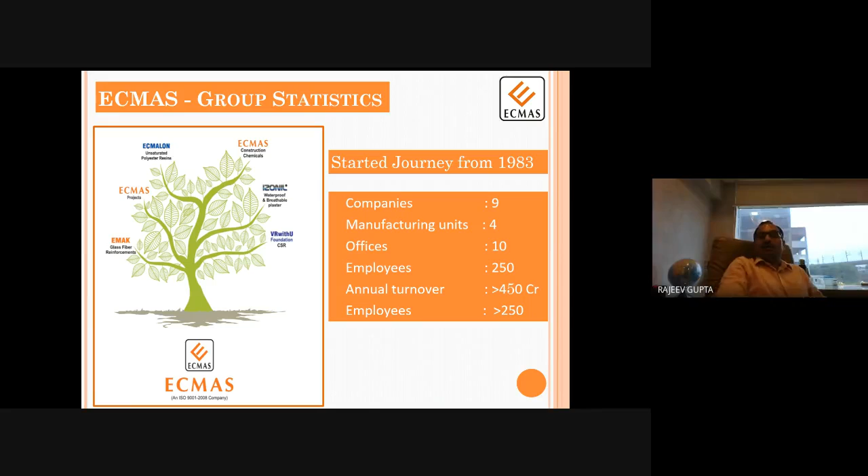Under ECMAS, we have 4 or 5 different companies, which includes ECMAS resins, under which we manufacture polyester resins, which are used primarily into manufacturing of FRP, fiber reinforced polymers. And we are a leading player, and definitely we are the largest one in South India for resins.

Our another line of business is ECMAS Construction Chemicals. Under this, we manufacture different kind of chemical solutions for construction industry. And we have more than 4 joint ventures with various European and American companies to introduce various unique and very innovative solutions to Indian market.

We also have a presence in real estate business through ECMAS projects, which construct some small format real estate projects, mainly in Hyderabad. We also have a company which deals into software, especially in healthcare softwares, and that is a company which is registered in USA, California. And we have a foundation which supports the education of poor children through We Are With You Foundation.

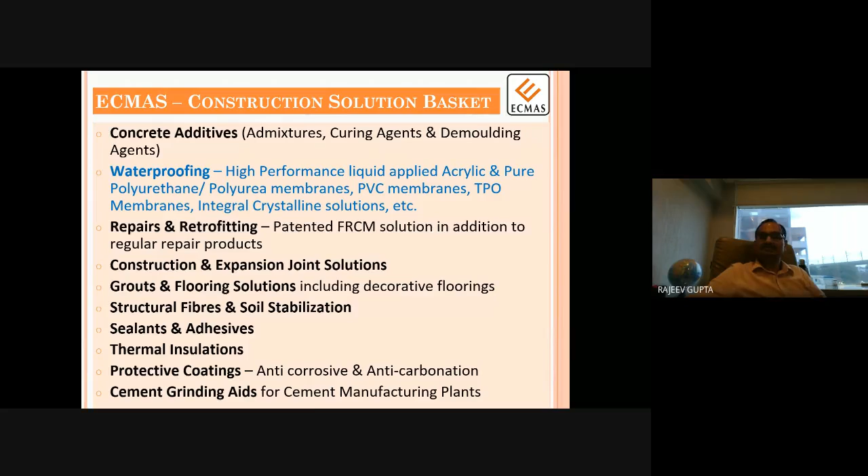Now I'm coming to our today's topic, that is basically energy efficiency and thermal comfort and recent developments in this field. So it's a very interesting subject, very relevant topic.

Nowadays, all of us as an engineer, consultant, architect or developer, we are very much concerned about conservation of environment. There is a lot of discussion, lot of concern about growing population. We all see rapid urbanization, rapid industrialization. There is an excellent growth of building infrastructure. There is a growing demand for energy. Along with this, we also see the effects of global warming, urban heat islands. So these are the effects and impacts of recent development.

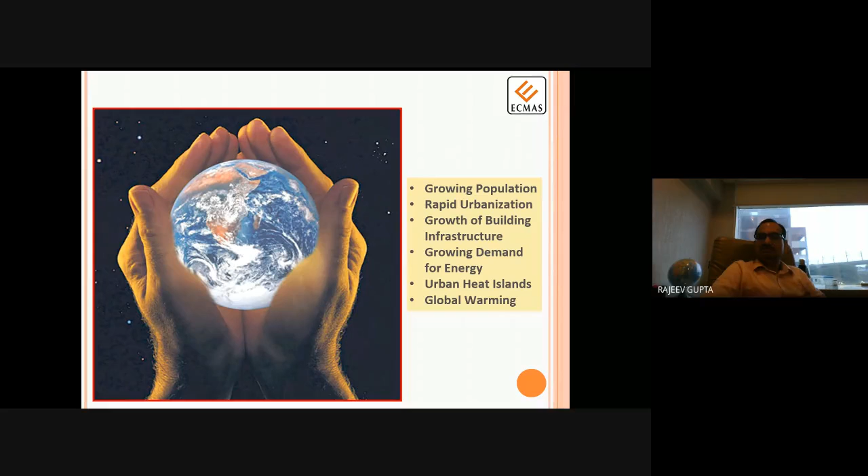So all of us hear a lot about green buildings and sustainability. What is green building? Why is it so important? Why are all of us discussing so much about green buildings and sustainability, protection of environment? So this concept has gained momentum and popularity in the last 2 decades, and has evolved a lot, especially in US and European countries.

But it is gaining momentum in China, India, and a lot of Eastern countries. In India, a lot of awareness has already come, and a lot of actual projects have already been constructed and delivered in the last 2 decades, which includes ITC Center, Godrej, Wipro, and so many buildings which have got LEED certification, categorized as gold or platinum rated buildings. So what is green building and why is it so important?

So green building is a building which is constructed with least environmental impact. It is constructed with design and construction processes which significantly reduce or eliminate negative impact of buildings on the environment.

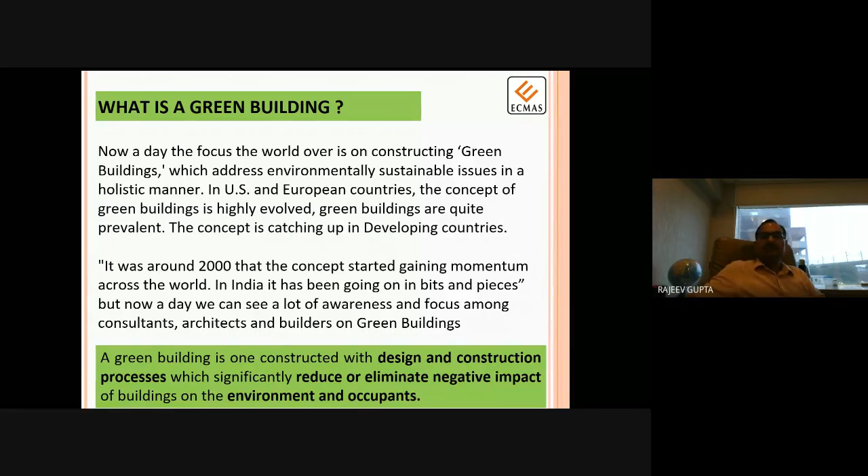So the main fundamental objective of green building is to conserve nature and natural resources. All natural resources are very scarce. We cannot produce natural resources. It takes millions of years to generate natural resources, fossil fuels, and all those things. So we have to be very responsible in exploiting these natural resources.

Then the second important objective of green buildings is to increase energy efficiency. The demand for energy is growing like anything, so we have to make very efficient use of energy.

Then an equally important concern is to improve the indoor air quality. When we construct, we use different kinds of materials, and some of these materials are not environment friendly, involving a lot of solvents which emit fumes and polluting gases that are not good for human health. So the objective is to use products which are eco-friendly, water-based, solvent-free, which don't have any environmental impact.

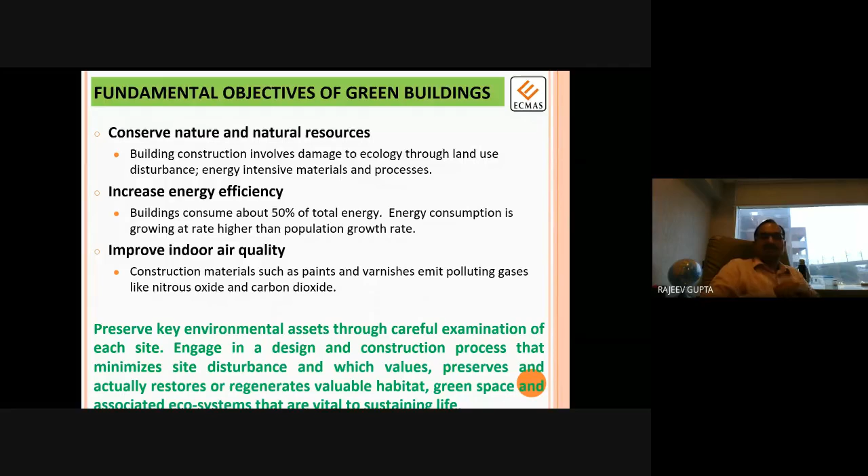What are the benefits from green buildings? The main benefit is to reduce destruction to ecology or environment, efficient utilization of resources during construction, and reduce construction waste, meaning we are adopting technology and techniques to reduce construction waste. Our focus is on reducing energy consumption after construction and during construction.

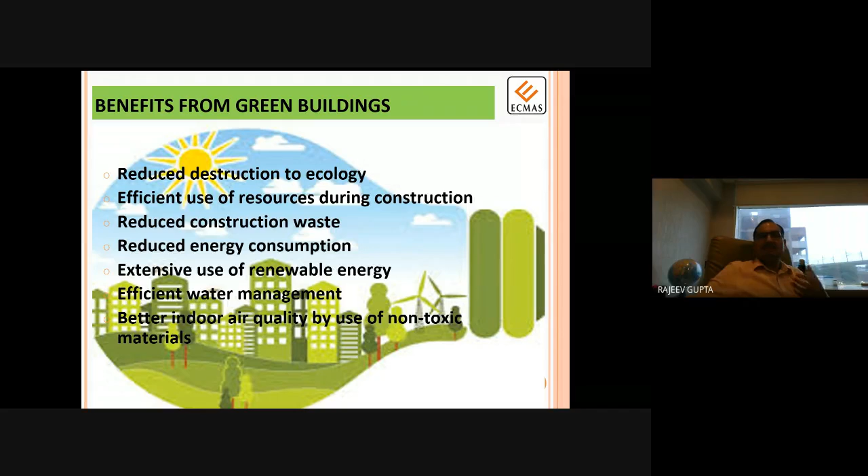And nowadays, a lot of focus is coming on extensive use of renewable energy, non-conventional energy resources like solar energy, wind energy, geothermal energy. Then efficient water management and better indoor air quality by using non-toxic and environment-friendly materials. So these are some important benefits of green buildings.

So there is always a question whether it is economical, cost-effective to construct green buildings. Definitely the cost of a green building may be a little more than normal construction, maybe 10 to 30% more than the normal cost. But a green building helps reduce energy costs over a long period of time, and these savings may be somewhere between 30 to 60 or 65%.

So if you consider the overall life cycle cost of any green building, it is actually economical and benefits are immense.

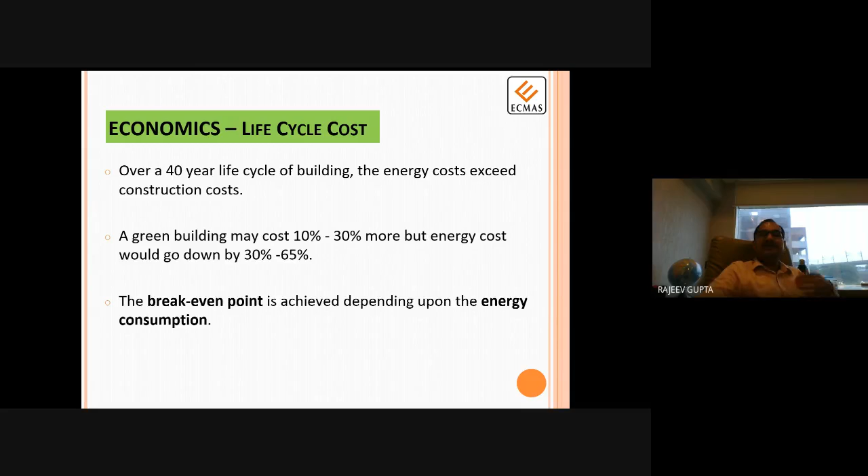So what are the strategies for green building achievement, or to achieve green building? We can put this under various categories. First, the most simple and most important to the consultant and architects, is applying basic architectural principles, which includes the optimal usage of natural resources, meaning natural light and conditioning of the space using natural ventilation.

Usage of energy efficient lighting. Intelligent features to reduce energy wastage, that may include sensor-based controls. So we are using intelligent lighting systems, intelligent ventilation systems which are fitted with sensors.

Usage of renewable energy sources, that includes more and more usage of wind power, solar power, and other renewable sources.

Then reducing the material usage in construction. If we use more materials during construction, it definitely results in more exploitation of natural resources. So it will always be better to adopt methods and technologies which require less usage of construction materials, and at the same time less wastage, meaning either less wastage or usage of recyclable products, or using some techniques to recycle construction waste to minimize overall environmental impacts.

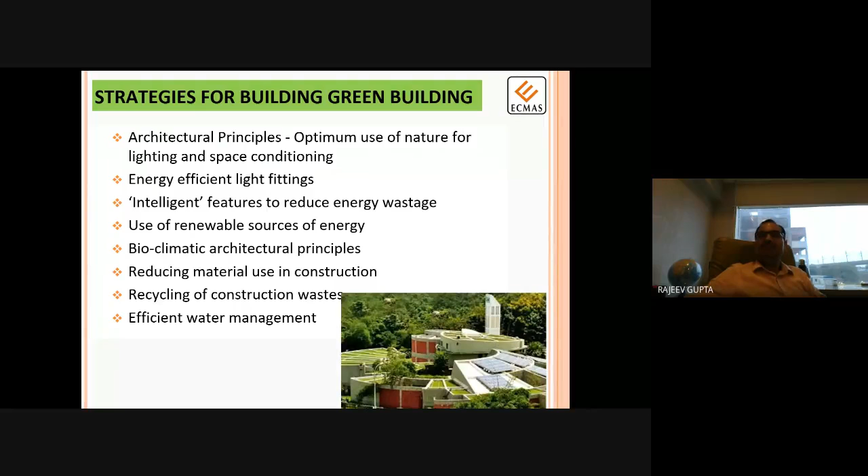So green building is a concept, but what we are more concerned about nowadays is energy consumption, especially for countries like India, which are developing, where there is a growing population, growing building infrastructure, and per capita energy consumption is growing. So there is a huge demand of energy.

And if we don't utilize energy efficiently, it puts a lot of environmental impacts, because producing 1 megawatt hour of energy results in production of huge carbon dioxide and other harmful gases, because most energy nowadays is produced through thermal power by burning coal.

So it is always better to use as less energy as possible without compromising thermal comfort or working conditions. So any attempt to save building energy is beneficial.

If we look at the energy consumption in buildings, most of the energy is consumed in air conditioning, for HVAC applications, heating or cooling. It's almost about 55% of total energy used in air conditioning, followed by about 20% for lighting, 20% for ventilation purpose, and 5-7% for other uses.

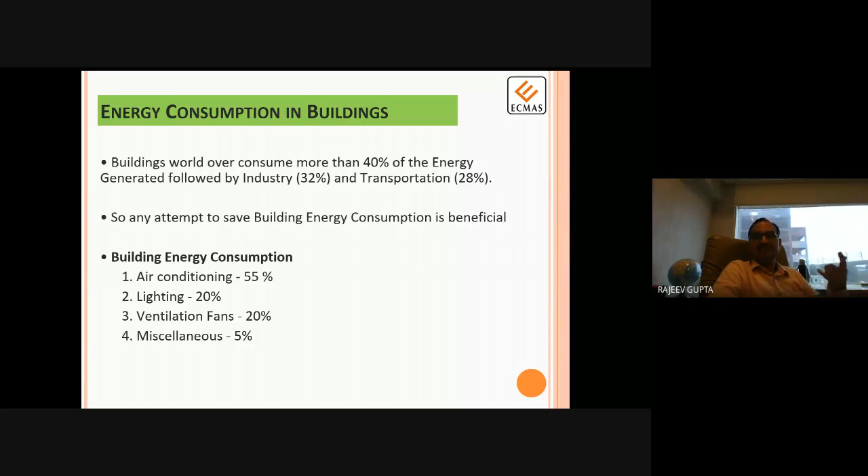So nowadays there is a lot of focus on energy rating of buildings, which basically studies and analyzes how efficient the building is in terms of energy utilization. That is basically a summary of a building's energy audit. It provides information about the building's energy consumption and its efficiency.

Then windows and glazings, and some loss happens through floors and openings.

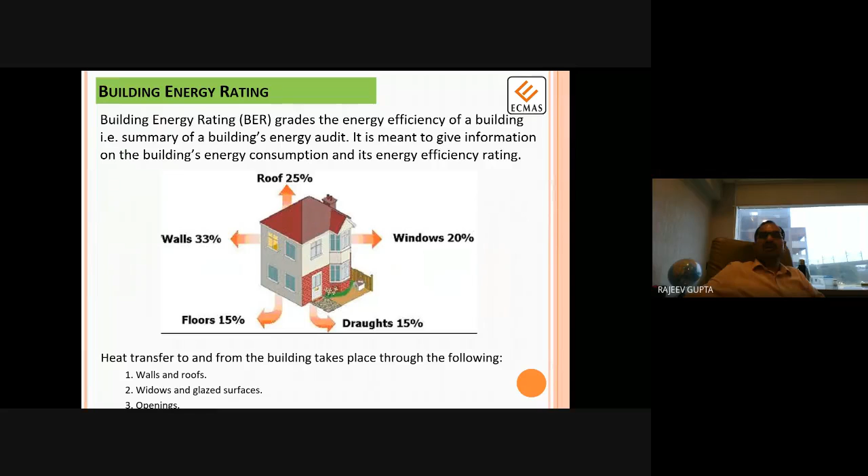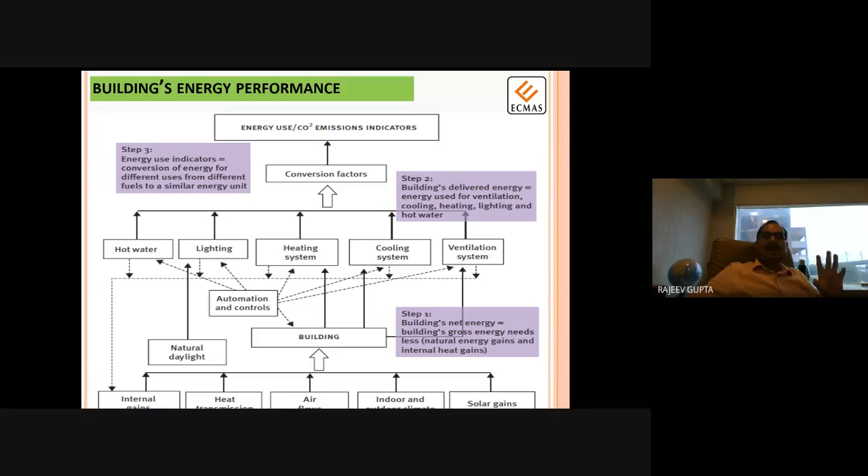So when we define energy ratings, or when we rate any building in terms of energy rating, they study a lot of things - various kinds of energy flows, various kinds of utilization, losses - and all these things are studied and analyzed. So what are the main factors which affect the building energy rating?

These include thermal insulation of the building, heat gains through glazed openings and windows, ventilation and air permeability, hot water system, and air conditioning of the space - that may be heating or cooling depending on the climate. Some countries are cold, so they require heating, and some countries are hot, so they require cooling.

And heat gains due to lighting and other internal usage of energy. So considering all this, there is a vast scope for energy saving or improving energy efficiency in buildings. It may be new construction, so we can design the buildings in such a way to maximize energy efficiency,

or it may be existing constructions, existing buildings. So we can study, analyze, and devise ways to improve energy efficiency in existing buildings. So there is a huge potential for energy saving. By efficient utilization of energy, we can save up to 40%.

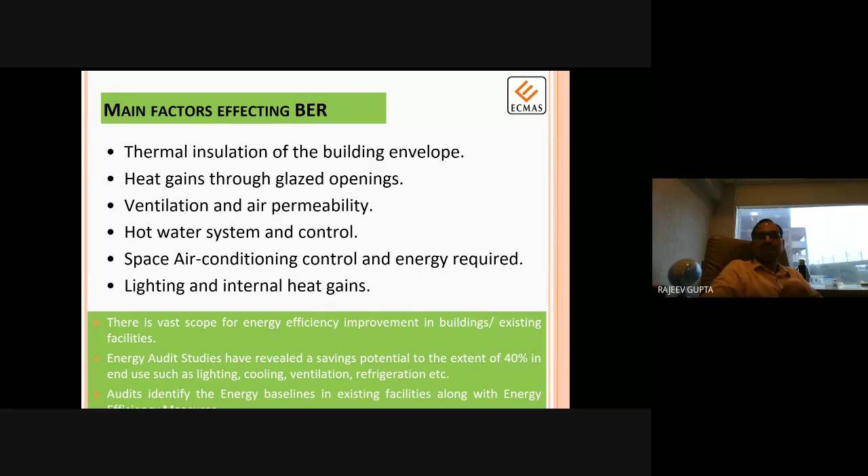So how can we reduce energy consumption, or improve energy efficiency? Either we can reduce energy usage for air conditioning, meaning heating or cooling, or water heating. We can also control energy consumption through efficient usage of lightings, office equipments, appliances.

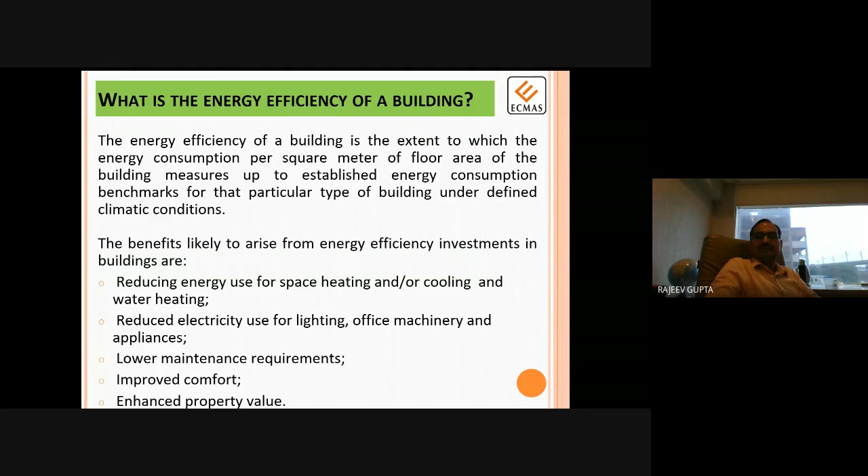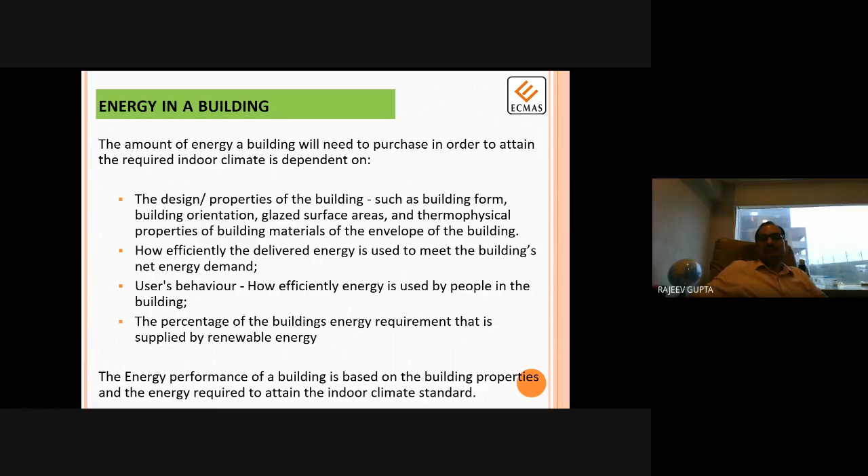So in nutshell, we can say we can improve energy efficiency of a building either by reducing the heating demand or cooling demand, or reducing the energy requirement for ventilation by using more and more natural lighting and more natural air for ventilation purpose.

Reducing energy usage for lighting, we can use energy efficient lightings, intelligent lighting systems, sensor based lighting systems. We can also reduce the energy used for heating water. We can adopt solar energy to heat water.

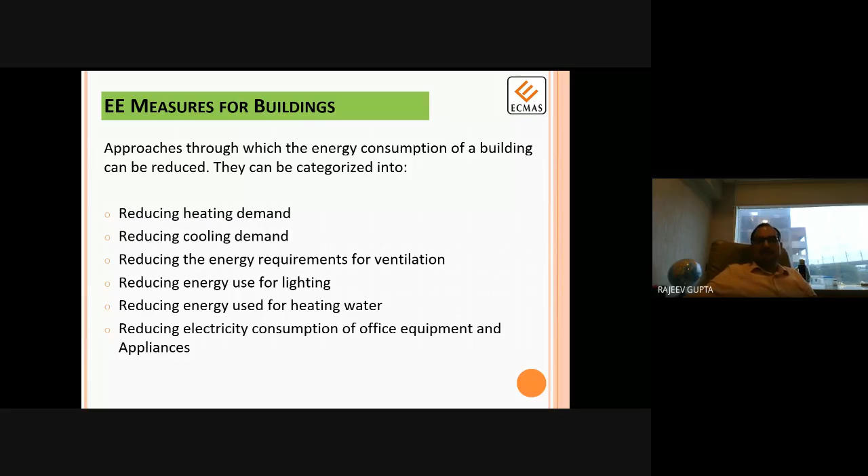And we can also use energy efficient appliances and equipments in residential, commercial, or office buildings, wherever we are talking about. So all these can be further detailed. I think no need to spend much time - briefly, we have already discussed.

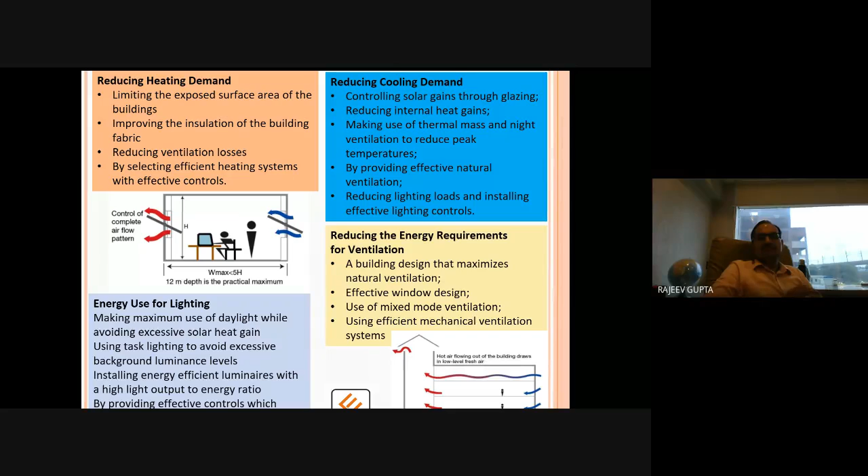So most important starts with the design of the buildings, meaning applying basic architectural principles to improve energy efficiency. That includes orientation of the building, usage of thermal masses, defining the correct surface to volume ratio, positioning and sizing of openings, windows, glazing, shading, selection of right construction materials for walls, roofs, windows, utilization of insulation systems, and using landscaping in such a way to improve the energy efficiency of the buildings.

So by taking all these measures, we can achieve 10 to 40% reduction in energy usage of any building, which is significant.

So first, we discuss using energy efficient appliances. Appliances nowadays come with energy labeling. So we can use star rated equipments and appliances to minimize energy consumption. That may result in almost 20% of energy savings.

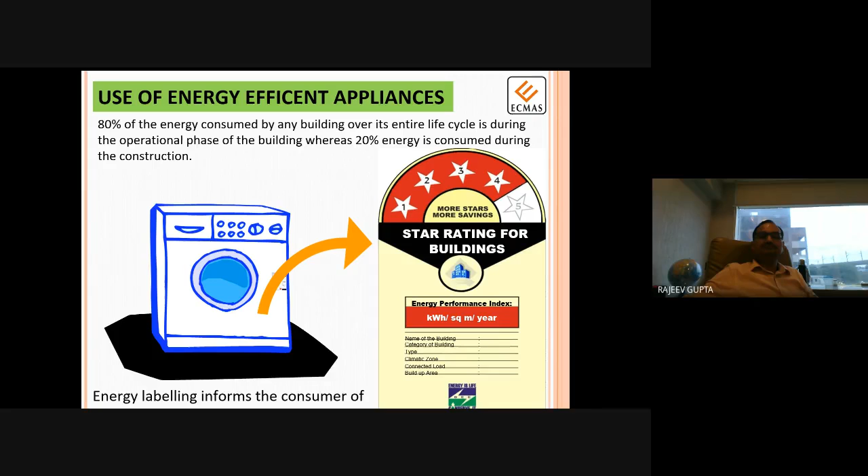Energy efficient lightings.

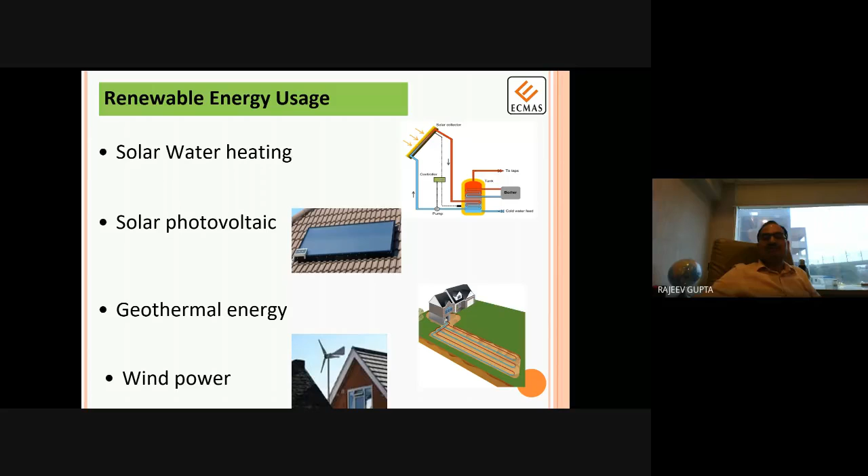Utilization of renewable energy usages like solar water heating, solar panels, geothermal energy usage, wind power, and nowadays usage of all these renewable energy sources is increasing. There is a lot of focus from government also. So nowadays in many metro cities, if a building is beyond a certain size, they want them to install solar panels to take maximum advantage of solar power.

Having an energy efficient building is beneficial to all of us, be it an architect, consultant, engineer, or builder. They are always looking for ways to enhance energy efficiency of the buildings by optimum utilization of energy, because it directly links with savings by reducing energy bills and also maintaining overall comfort.

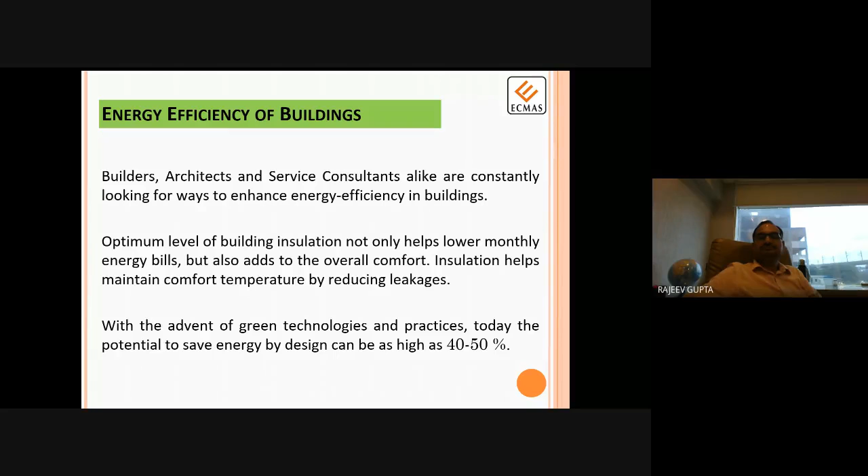So energy efficiency is one thing, but equally important is maintaining the right thermal comfort inside buildings. Because most of us spend more than 80 to 90% of our total time in buildings, either office or home. So if we don't get sufficient thermal comfort, it is very difficult to work. It is not good for health also. So thermal comfort is very important. There is a need to strike a balance between energy efficiency and thermal comfort.

We want to get more and more thermal comfort, but at the same time, we want to reduce the consumption of energy. So both are two different phenomena, but we can achieve both at the same time by intelligent usage of different building materials, construction materials, and intelligent design.

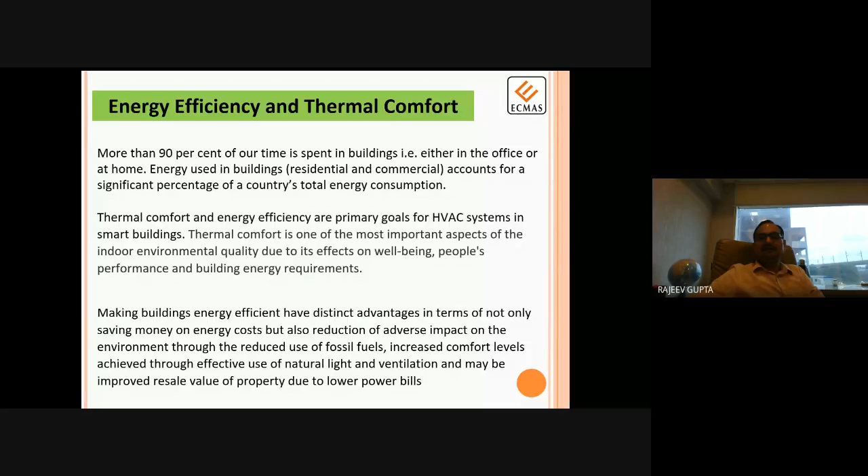So what is thermal comfort? Thermal comfort is basically a heat balance in our body, by keeping our sweating rate within comfortable limits, so that we don't feel too cold or too hot. Because if it is too cold, we start feeling restless. If it is too warm, or warm and humid, it is very difficult to work. We feel tired. So a right temperature, a right humidity needs to be maintained.

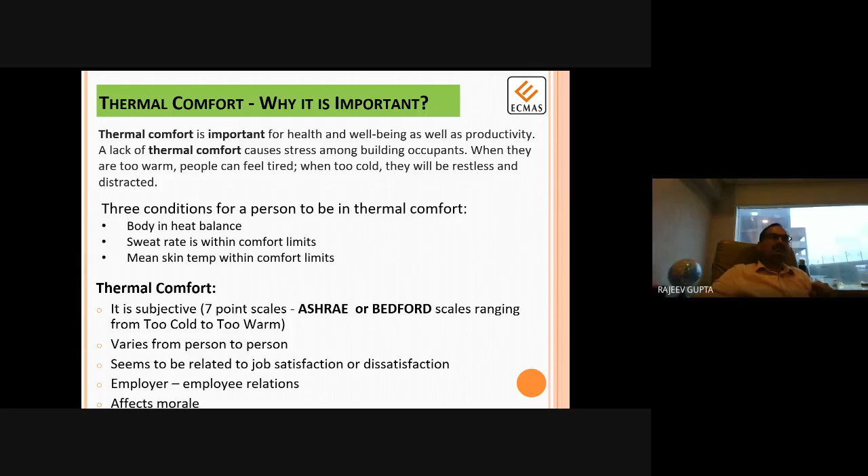Thermal comfort level varies from person to person. It is not the same for all. And it has a great impact on a person's working efficiency and his health. So we cannot compromise on thermal comfort. A lot of studies have been conducted, and a temperature of around 20 to 22 degrees is ideal for best working efficiency or productivity and health.

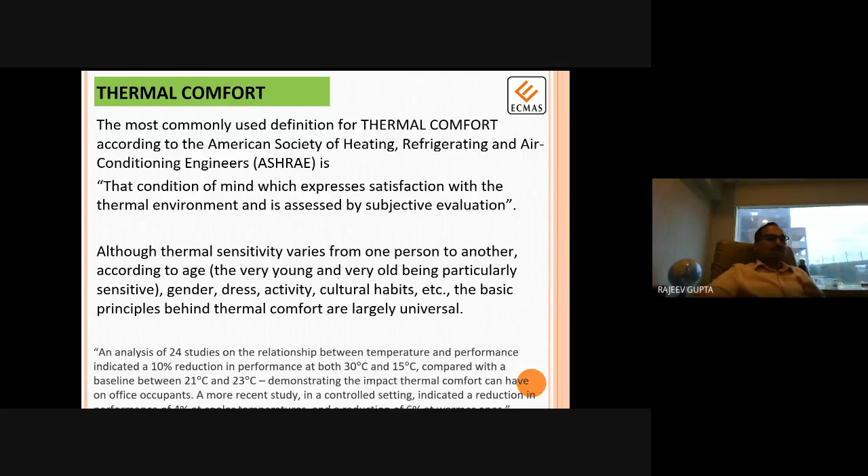But climate is not the same everywhere and during all months of the year. India is a large country which experiences different kinds of climatic conditions in different parts, including hot climate, cold climate, hot and humid, and moderate climate. So we experience all different kinds of climates in different parts of the country and in different seasons. We need to understand the climate and the thermal comfort, and accordingly design our buildings.

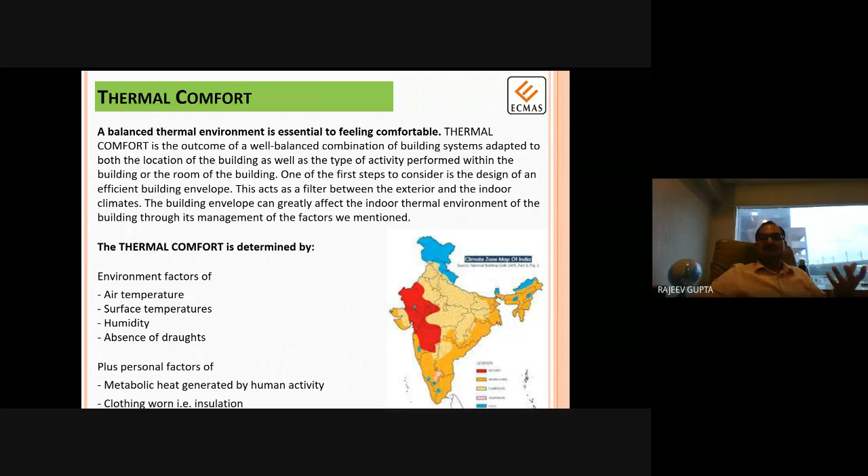So how can we design buildings for thermal comfort? There are 3-4 very basic things. By maintaining correct air tightness and ventilation. What do you mean by air tightness and ventilation?

Because a lot of heat or cooling loss happens through different openings and also from different surfaces, it may be roof, it may be walls. So we need to create an envelope which is airtight, which minimizes heating or cooling losses and controls the indoor thermal environment.

Second, thermal inertia. So we use such materials to construct the building, like we choose between bricks, stones, wood, blocks, which have a direct impact on the internal environment - meaning how fast external conditions transfer or affect the internal environment of the buildings. So by choosing correct building materials, we can minimize that.

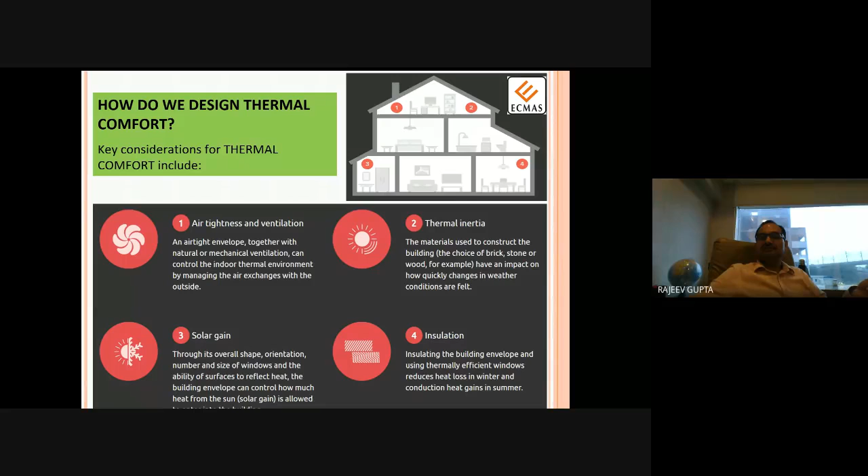And the fourth one is insulation, usage of insulation. So insulation is becoming very, very important, especially in extreme climatic conditions which are very hot or very cold. Because insulation helps in reducing the thermal losses, it may be cooling loss or heating loss.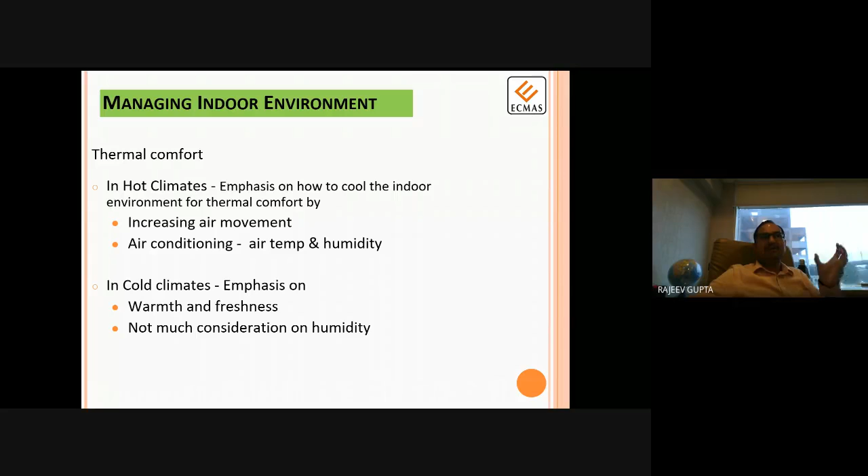So if it is a hot climate, our focus will be on cooling the indoor environment by increasing air movement, maintaining the air temperature and correct level of humidity. If it is a cold environment or cold climate, our emphasis will be on warm and fresh air. In cold climates, humidity is not as important as it is in hot climates, because if it is hot and humid, it becomes unbearable.

If you look at typical buildings in India, most roofs nowadays are constructed from reinforced cement concrete, RCC, thickness varying from 100 to 150 mm. Walls are usually 125 to 225 mm, meaning 4.5 inches to 9 inches brick wall with plaster, or nowadays we are using block walls also.

We can design roofs of the building in such a way that it reduces thermal losses. If it is a cold climate, it should not absorb more heat, and it should not help in reducing the inside temperature, meaning cooling loss should not be there.

If it is hot climate, it should absorb less and less heat, and it should radiate more and more heat. So the overall objective is to achieve least absorption of heat, which results in increase in temperature.

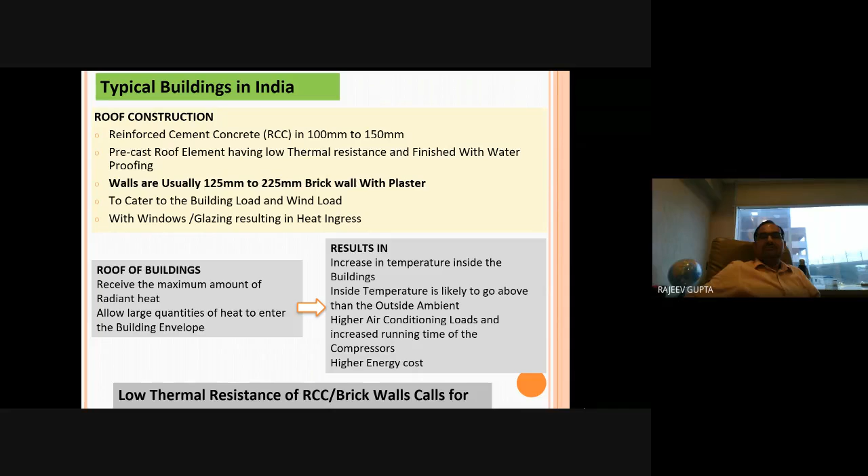So how can we achieve this? There are a number of ways. The most important solution nowadays, which we are adopting very fast, is insulation. We are using different kinds of insulation. There are different types of insulation materials available, that includes thermocol, XPS extruded polystyrene, spray applied PU foams, foam concrete, glass wool, mineral wool.

So various kinds of building insulation materials can be used to take advantage of thermal insulation. Because a building without insulation results in a lot of energy losses, a lot of energy wastage. So if you want to reduce the energy consumption and improve the energy efficiency, usage of insulation materials helps a lot.

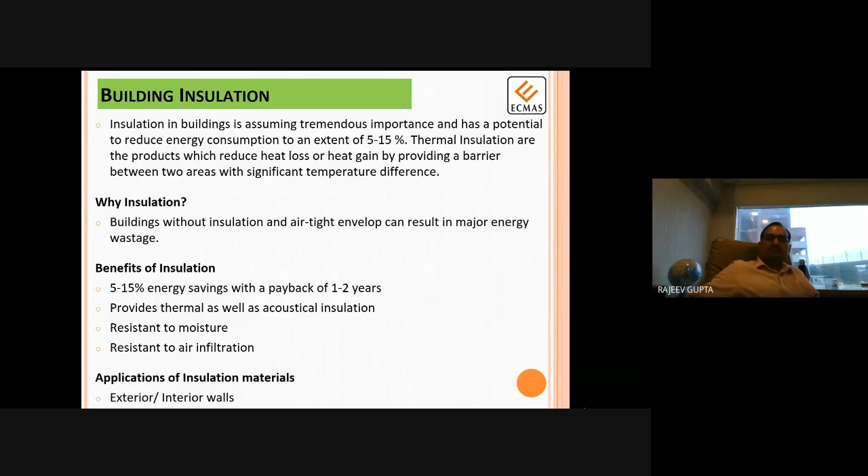There are two ways by using insulation we can improve building energy. First, when we create an envelope, using insulation for roof and walls and using correct type of windows, we can create an airtight envelope, and that will minimize the energy losses. Second is basically during construction, meaning how we can construct energy efficient buildings.

Second is post construction, meaning maintenance part, operational part, meaning how we can improve the energy efficiency, by using intelligent lighting or energy efficient lighting, using energy efficient air conditioning and heating systems, and all those things, and more usage of renewable energy resources like solar power or wind power.

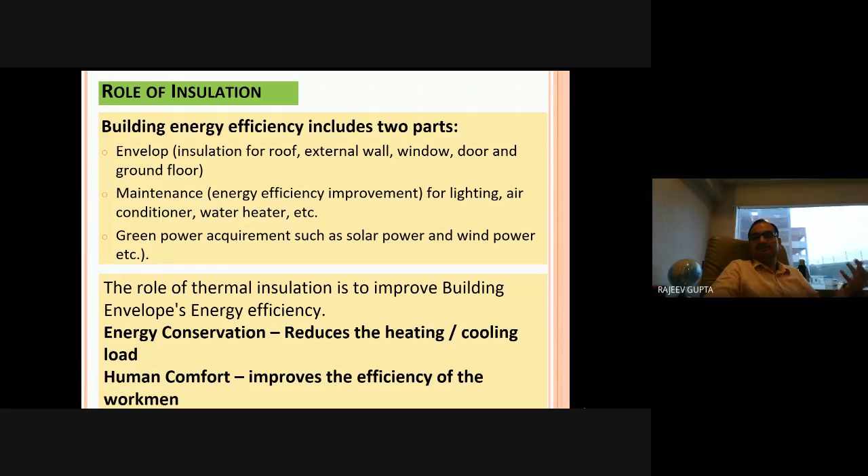The main role of thermal insulation is to improve the building's thermal efficiency or energy efficiency. It helps in conservation of energy by reducing the heating and cooling load and improving the thermal comfort. That is directly linked with the productivity and efficiency of the person and health of the persons living inside the building.

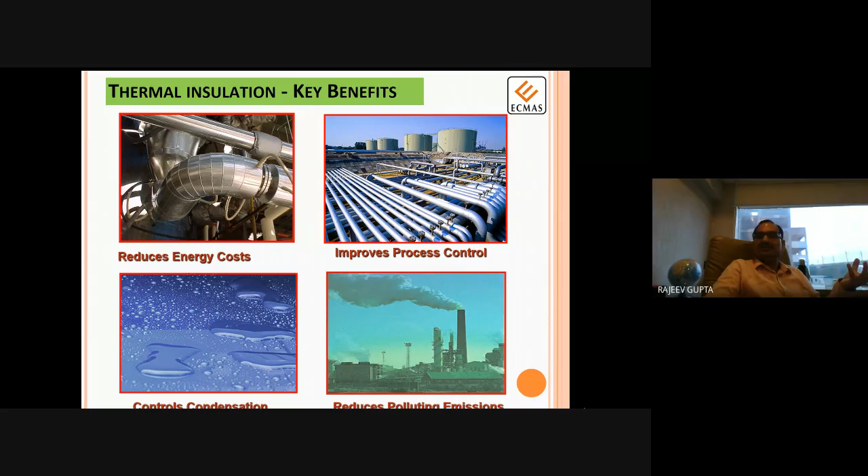Insulation is not only important for buildings, it is equally important for industrial processes and applications also, because it helps in reducing energy costs, improves process control, controls the amount of condensation, and reduces polluting emissions. When we use more energy, it requires a lot of exploitation of natural resources to produce it, so if we control energy usage, it helps in reducing emissions and carbon footprints also.

Thermal insulation also helps in improving the internal environment, meaning working conditions inside a building, and overall good return on investment. So if we can improve the thermal efficiency and reduce the energy loads, that will definitely result into better returns or more savings.

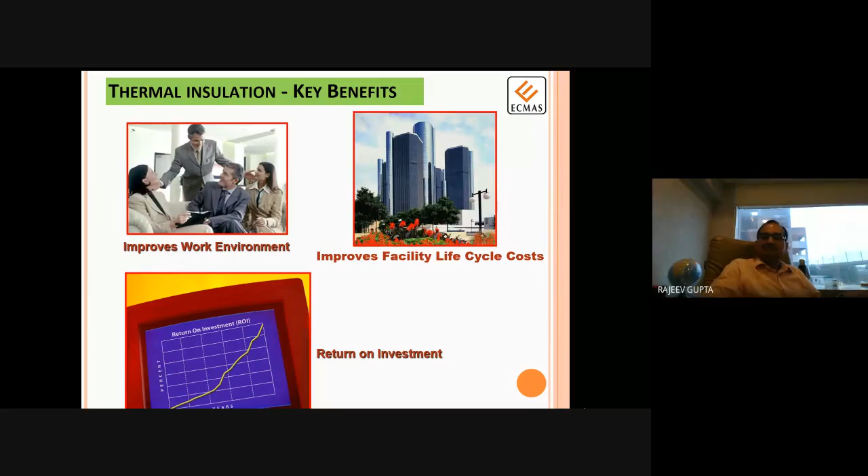Selection of insulation materials generally depends on two things, R value and U value. R is basically the thermal resistance offered by any insulation material, the resistance offered to heat flow. U value is the thermal transmittance, which is the inverse of thermal resistance, meaning U is equal to 1 by R. U is the main criteria based on which we select any insulating material for buildings or any other industrial processes.

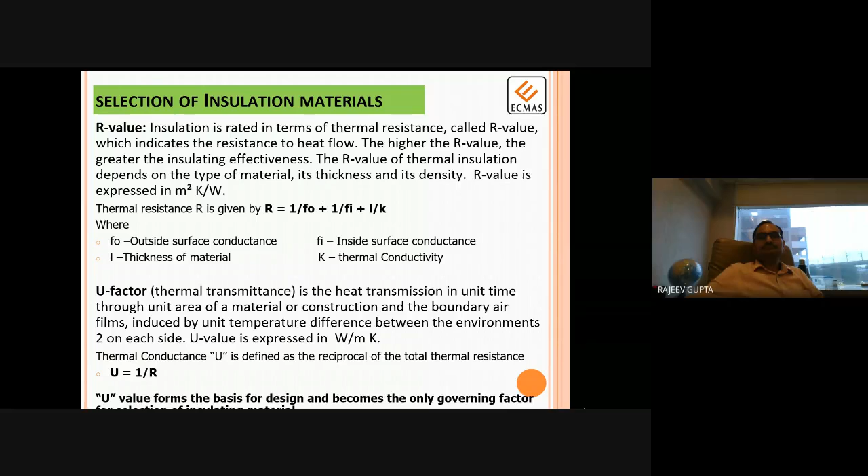Nowadays, in addition to usage of different insulation materials, there is another trend of using precast construction. Precast construction is basically producing a building inside a factory. Instead of constructing at site, we are using more and more precast elements, which may include beams, columns, and sometimes different elements of buildings. That results in various benefits.

First, these are high quality and more durable. In terms of costing, they are more cost effective, they help in conserving energy, and give better quality control and faster construction. So there are various benefits of precast construction, and that is one of the latest trends towards green building construction and improving energy efficiency during construction.

What are the emerging insulation materials? More and more usage of AAC blocks and panels instead of red clay bricks.

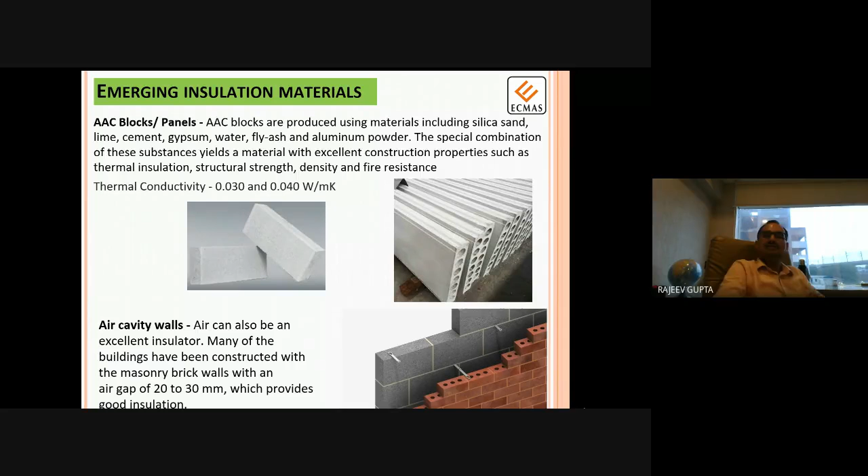Another trend is to create cavity walls. When we create cavity walls, there will be air between the two faces of the wall, and air is a bad conductor of heat. It acts as an insulation material. If you provide a gap of 20 to 30 millimeter, it offers a good amount of insulation. The usage of cavity walls is also increasing.

Then another insulation material, extruded polystyrene boards. These have been used for the last 2 to 3 decades. They have very good thermal conductivity. They come in the form of preformed panels of different thicknesses, which can be directly installed as over deck insulation system or under deck insulation systems, and they can also be used for walls.

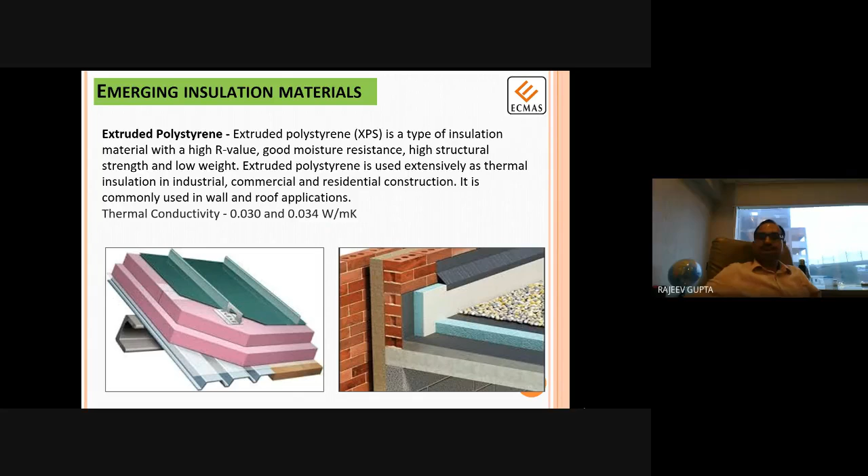If we look for a cheaper alternative for insulation, then expanded polystyrene, that is very common. Expanded polystyrene board offers a good insulation, but it has a lot of issues in terms of performance, in terms of durability.

So people are shifting more towards XPS or spray applied PU foam insulation. Nowadays, the trend of spray applied polyurethane foam is increasing. As compared to expanded polystyrene or extruded polystyrene, there is a big difference. This is basically applied at the site as per requirement and desired thickness. It is a spray applied, seamless, jointless, fully bonded system. That offers very good thermal insulation because thermal conductivity is very low. It ranges from 0.023 to 0.024 watt per MK. That is the lowest among all these 4-5 insulation materials we have discussed so far.

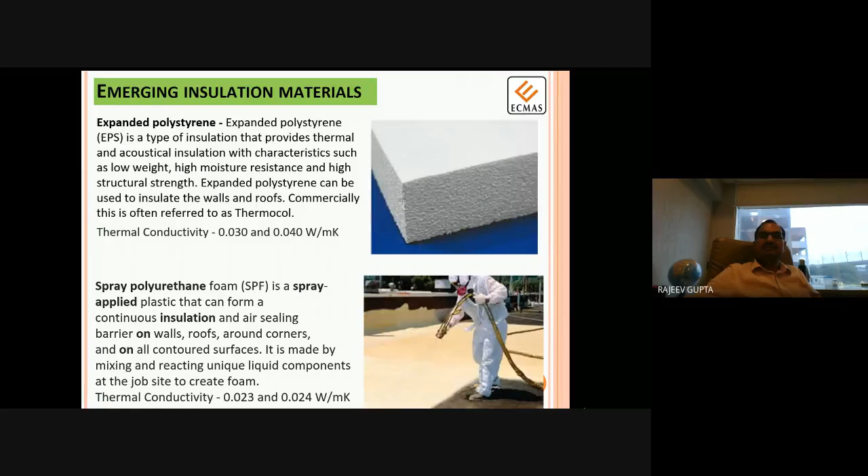Another very commonly used material is foam concrete. Foam concrete is a very easy and very durable system, cost effective as well. It offers very good resistance to thermal losses and is mainly used for roofs to provide insulation as well as to create slopes.

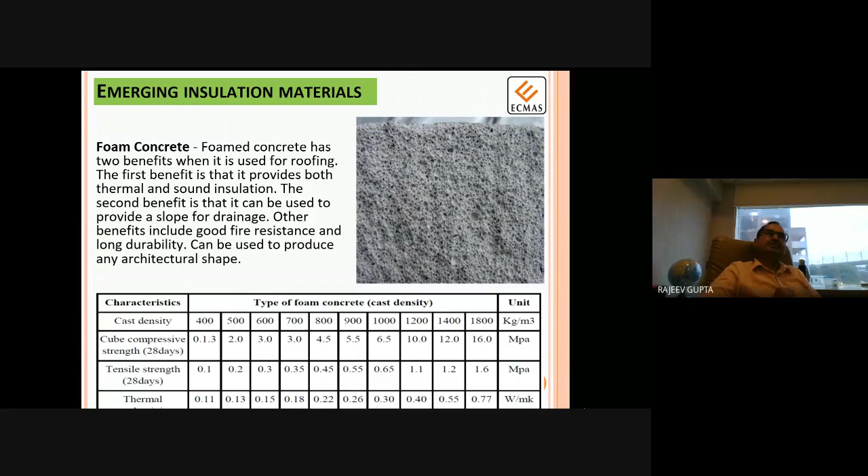So there are many different insulation materials available to be used in buildings, but still the usage of insulation is very low in most buildings. According to a recent survey, it has been found that many people don't have any idea about insulation specifications. They don't understand environmental impacts of more and more energy consumption. They are not very concerned about energy efficiency of buildings, or they are not clear what cost they will invest and what savings they will gain out of using insulation, and what will be the overall payback period. So all this leads to low usage of insulation materials and poor efficiency of energy consumption.

So as consultants, architects and engineers, it is our responsibility to make people aware, make people understand the importance of insulation and importance of energy efficiency.

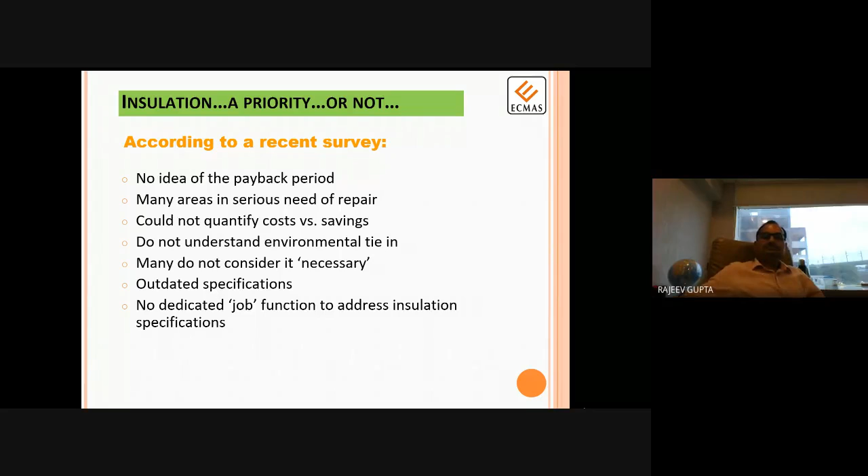Other latest trends towards improving energy efficiency and maintaining thermal comfort is green roofs. Lot of buildings we can see with green roofs, and this trend is increasing. Although it is not a new trend, in some European countries they have been using green roofs for more than 6 decades. But in India, this concept is popularizing now, and this is gaining momentum in the last 1 to 2 decades only. So what are green roofs and how do they contribute towards energy efficiency and maintaining thermal comfort?

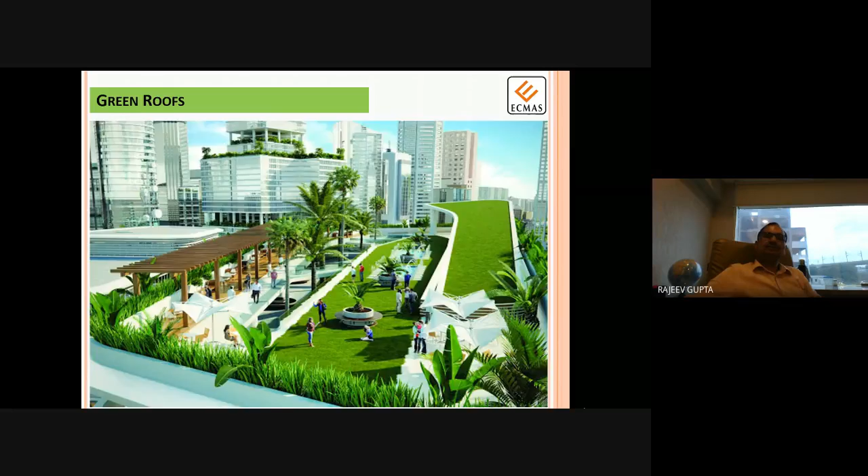What is the concept behind green roofs? When we construct more and more buildings, we are basically losing natural space, which otherwise would have been occupied by vegetation and greenery. So when we construct, we are losing that space. But the same can be compensated by growing plantation, vegetation on the roofs. And there are multiple benefits of green roofs.

Basically a green roof is partially or completely covered with vegetation or growing medium. A typical construction of green roof will involve a good waterproofing system followed by a growing medium where vegetation can be grown.

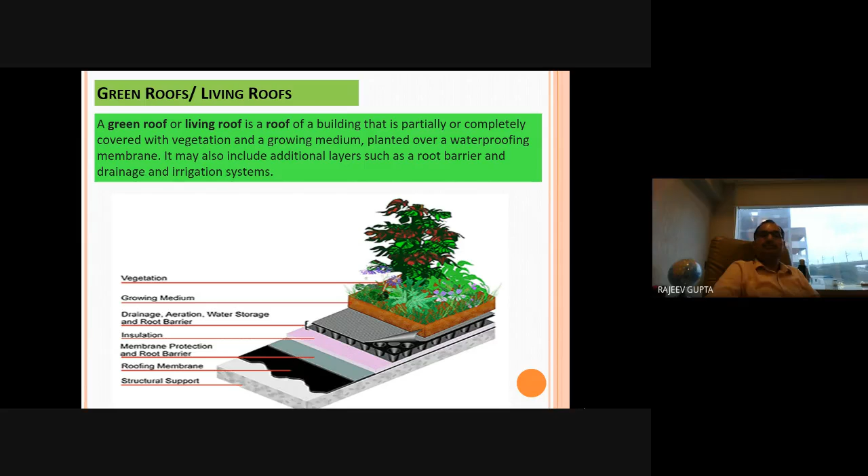So green roofs can be put under 3 categories: extensive green roofs, semi-intensive green roofs, and intensive green roofs. So 2 broad categories: intensive and extensive, and semi-intensive is in between. When we say extensive green roof, we are talking about very small size plantation or vegetation like grass, herbs, mosses, which doesn't grow beyond a certain height, maybe about 6 to 8 inches maximum, which doesn't put much weight on the roof of the building, and overall cost of installing such green roof is very low, maintenance costs are very low.

On the other hand, when we talk about intensive roofs, these are designed to grow larger plants, where height of the plant may be 6 inches to 1 meter, or sometimes more than 1 meter also, which puts a lot of weight on the structure, which may vary from 180 to 500 kg per square meter.

The overall cost of installing such roof is high, and maintenance cost is also high because we have to regularly maintain such intensive green roofs. And semi-intensive is in between the two. So based on our overall requirements, budget, and other factors, we can choose either intensive, extensive, or semi-intensive green roof.

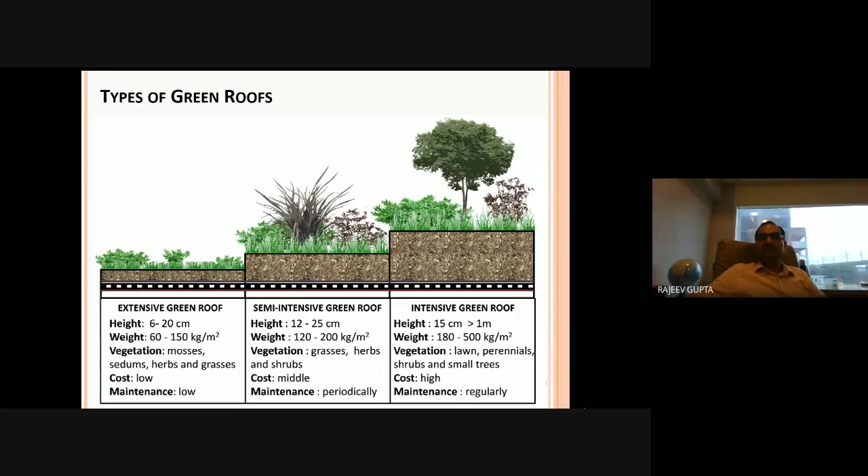What are the benefits of green roofs? Why are we talking so much? Why is this concept gaining more popularity? Because it helps in two different kinds of benefits: environmental benefits and financial benefits.

In terms of environmental benefits, it helps in reducing heating of the buildings. When we add greenery on the roof, definitely the roof and other parts of the building will absorb less heat. It offers good thermal resistance also, so overall cooling costs, or overall air conditioning cost of the building, reduces when we use green roofs.

Another way it helps is because when we grow plantation and vegetation on the roofs, a lot of evaporation happens, and that helps in controlling the temperatures.

It also helps in reducing the storm water effect, because during heavy rains, most of the water will flow away. But if we have a green roof on the roof, a lot of water will be absorbed.

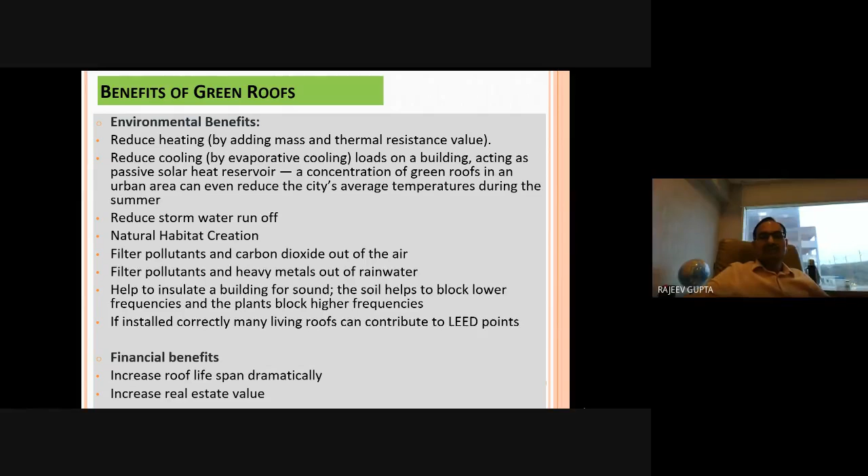So it is not very simple to install a green roof on a building. It requires a lot of consideration in terms of waterproofing, in terms of maintaining heat balance, considering the overall load impact. So all of this needs to be considered.

But having a good waterproofing system is very, very critical and important to grow a green roof, because a green roof will always be exposed to water, and generally these are large open areas. So we need a good waterproofing system which can accommodate all kinds of thermal expansion and contraction, which can resist the growth of roots, which can resist various kinds of chemicals and pesticides required for green roofs, and which can accommodate traffic also.

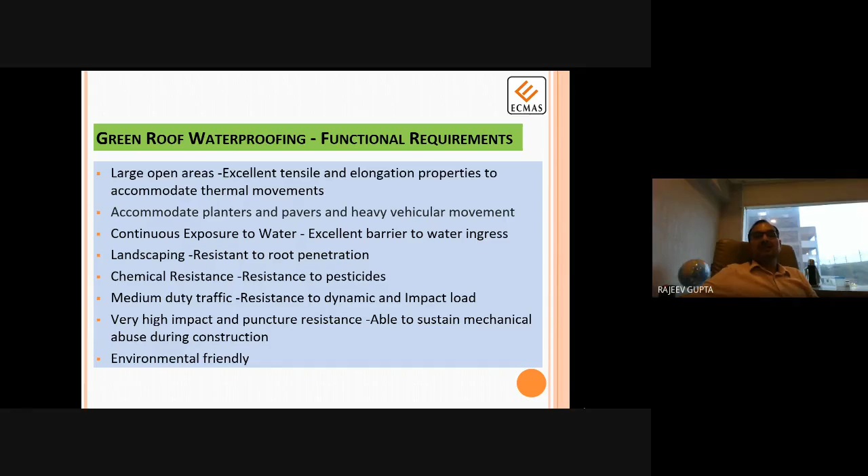At the same time, these materials should be environment friendly. So considering all these factors, we need to choose the correct waterproofing system and overall green roof system. Nowadays, various waterproofing solutions are available, in the form of membranes or liquid applied coatings. But we recommend liquid applied coatings like polyurethane and polyurea, which are fully bonded with the substrate, which can accommodate thermal expansion and contraction, which are seamless and free from joints. They can take any shape as per the geometry and construction of the roof.

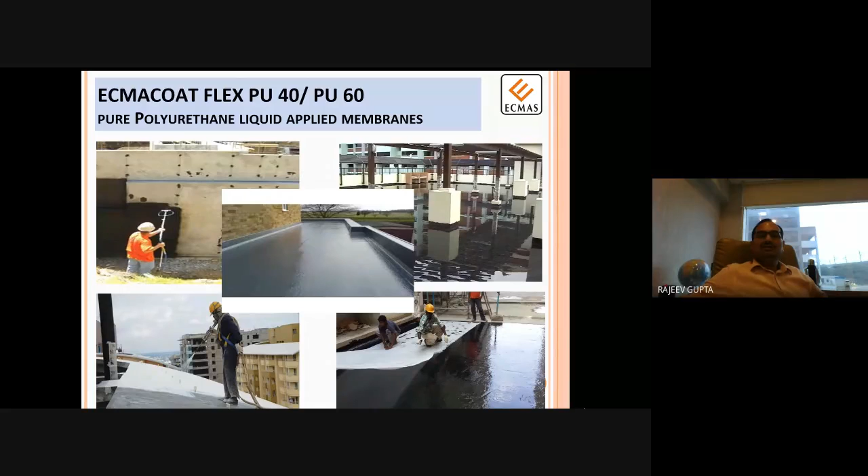These are normally applied with the help of spray or roller. After application, they form a seamless, joint-free, fully bonded film, which has good flexibility, good capability to accommodate expansion and contraction, and which is very durable.

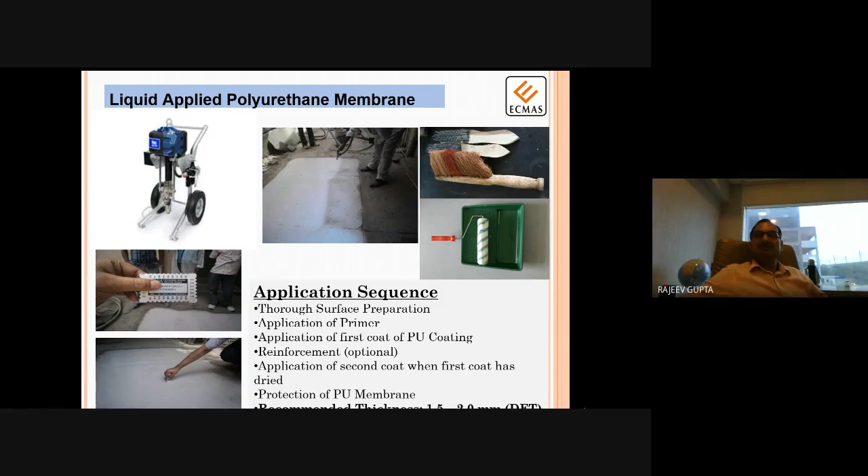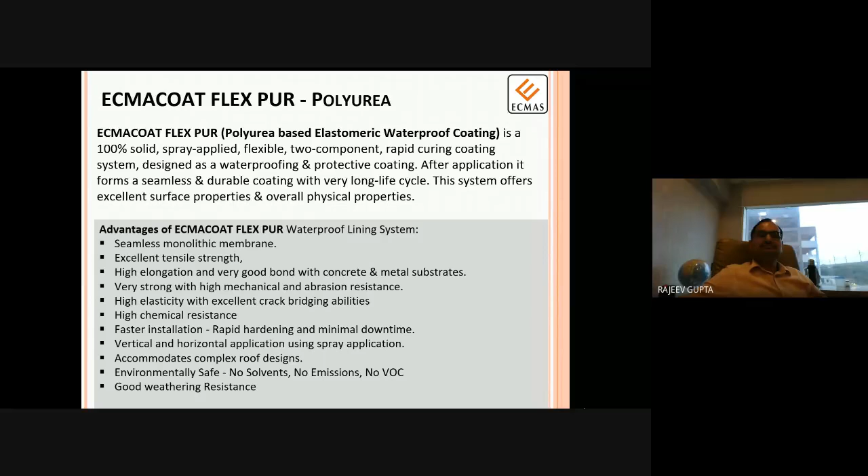So this is a basic system adopted for green roofs. On the main concrete slab, a good waterproofing system is applied, followed by an insulation system. Insulation may be there or it may not be.

Then we need to have a good growing media. That includes installation of drainage boards, geotextile and soil. The main purpose of providing drainage board is to drain out the excess water and at the same time maintain the exact right amount of moisture and humidity.

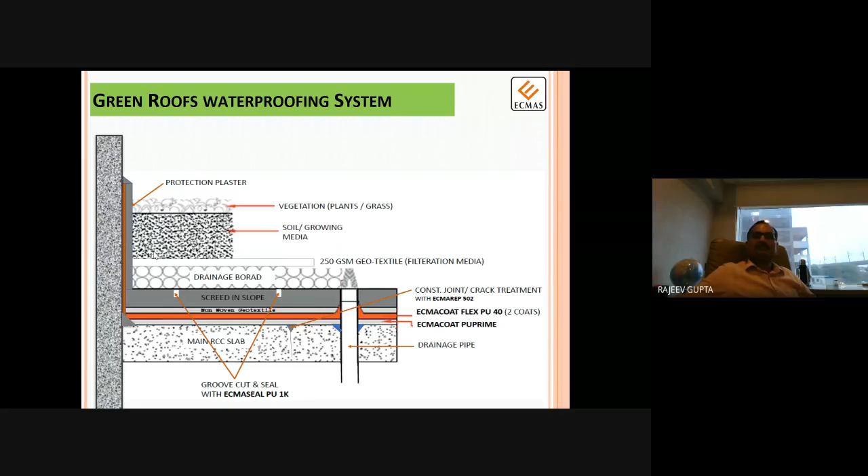So having a green roof helps in many ways and its trend is increasing. Another trend which is becoming very popular nowadays is cool roofs. Earlier we have been talking only about waterproofing systems, but now we are talking waterproofing along with thermal insulation. Various kinds of products and solutions are available. By using those solutions, we can make our buildings energy efficient, create more thermal comfort, and achieve a lot of savings.

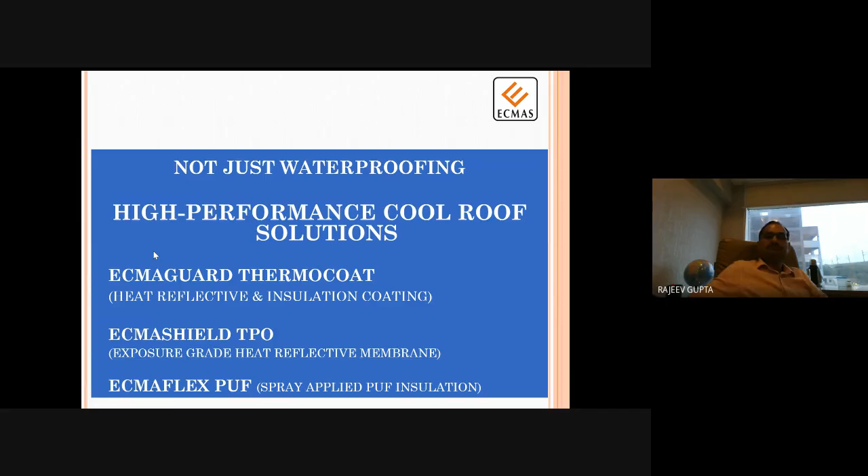So what is the concept of cool roof? Most of the buildings absorb a lot of solar heat. This heat is directly transferred to the spaces below the roof and increases the inside temperature. But we can control the amount of this heat which is transferred inside the building. So either we can use some materials which reflect more and more of this solar heat and emit more and more of the absorbed heat.

So a product with high solar reflectance and a product with high emittance will help in reducing heat absorption. Normally we say that there are some surfaces which absorb a lot of heat, especially dark color or black surfaces. And light or white color surfaces reflect most of the heat and absorb very less heat. So the cool roof coatings are designed on this principle only.

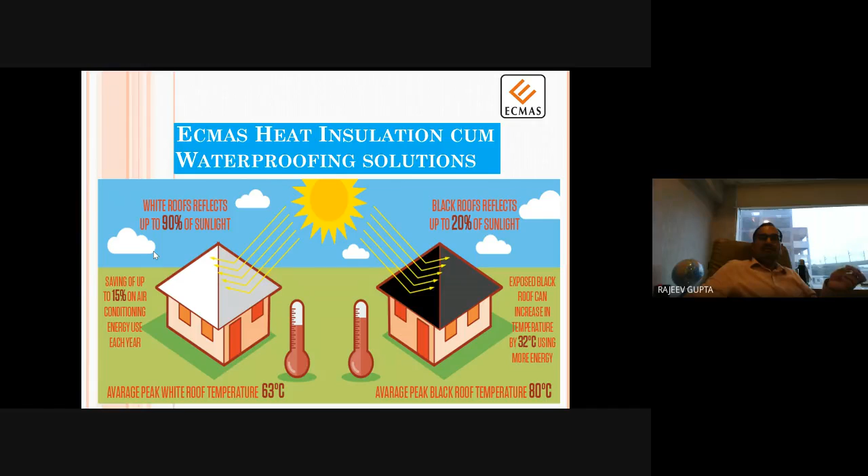So we need to understand why we should use cool roofs. Nowadays, most of the buildings have a lot of air conditioning systems installed to ensure right thermal comfort. These air conditioning systems are continuously working and causing a lot of power bills. But this can be reduced by using cool roofs.

Because air conditioning not only results in more and more power usage, but it also has a lot of environmental effects. Because more power means more emissions, more exploitation of natural resources like coal, gas. So we should always try to minimize the energy consumption inside the buildings.

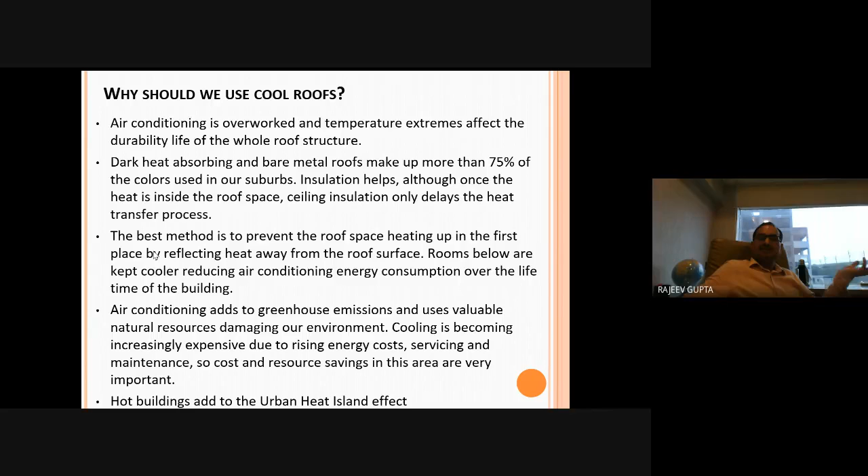And India being a tropical country, we are more concerned about heating. As population is growing and urbanization is growing, we experience heat island effect. What is heat island effect? The temperature inside urban areas, especially around the cluster of commercial or residential buildings, is more than the temperature outside the city. So there is a temperature difference that can be from 1 to 3 degrees between rural and urban areas.

And this temperature difference may become more, maybe up to 10 degrees in case of evenings, especially in a city which has more than 1 million people. So by using green roofs or by using cool roofs, we can help reduce the heat island effect, and we can help achieve better energy efficiency.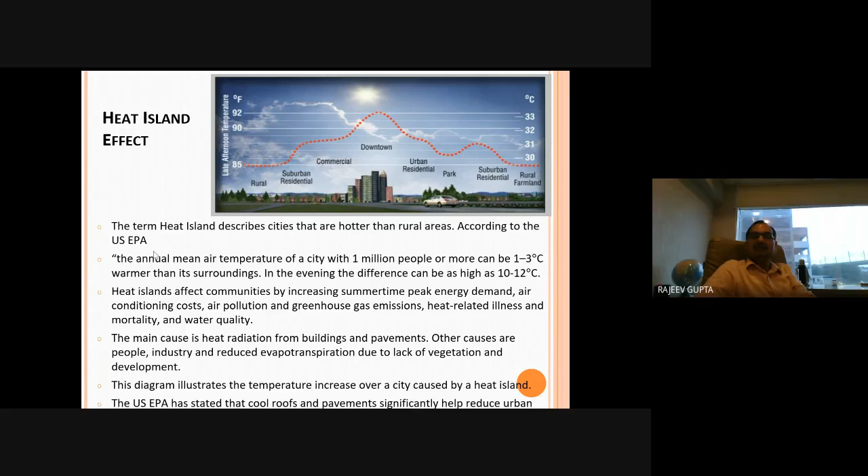So what are the benefits of cool roof coatings? They help in reducing interior temperature by 5 to 10 degrees. There are some coatings which reflect more and more of heat, absorb less heat, and help reduce the inside air temperature. If we look at the roof surface temperature, that is also a significant difference we can experience between coated surface and non-coated surface. We can find a temperature difference of 20 to 60 degrees in peak summers.

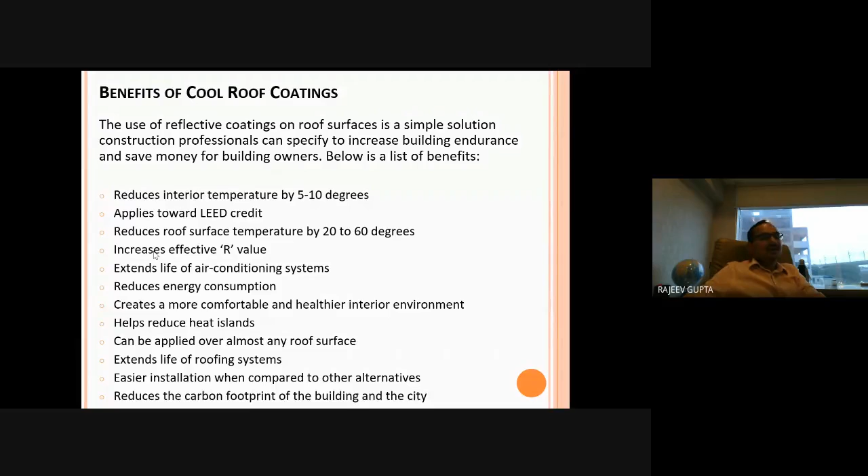So when we use more of cool roofs, we consume less energy. That helps in reducing energy costs and extending the life of air conditioning systems. And these coatings can be applied on almost every kind of surface. It can be metal, it can be concrete, it can be wood. On all types of surfaces we can apply.

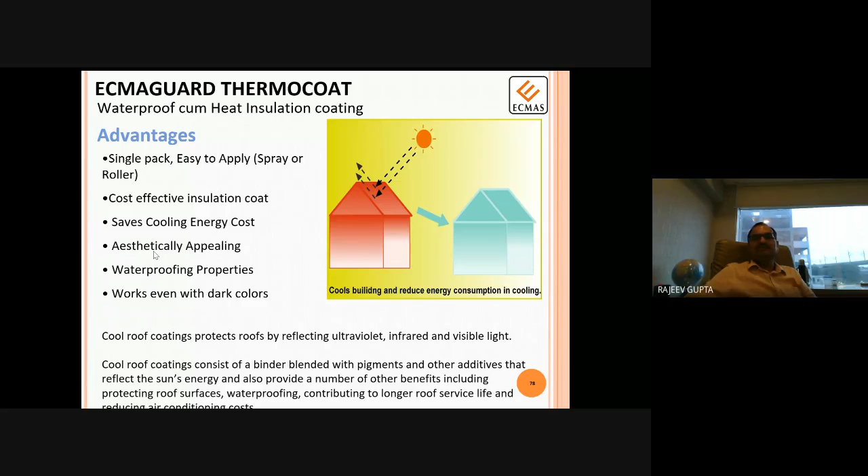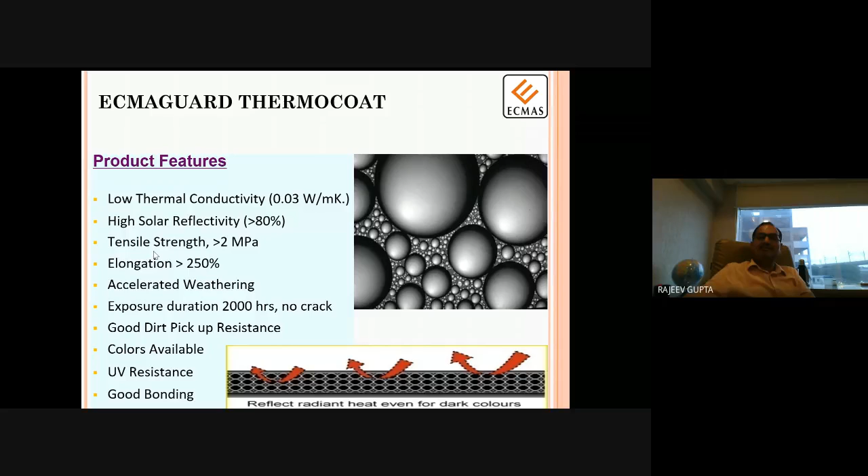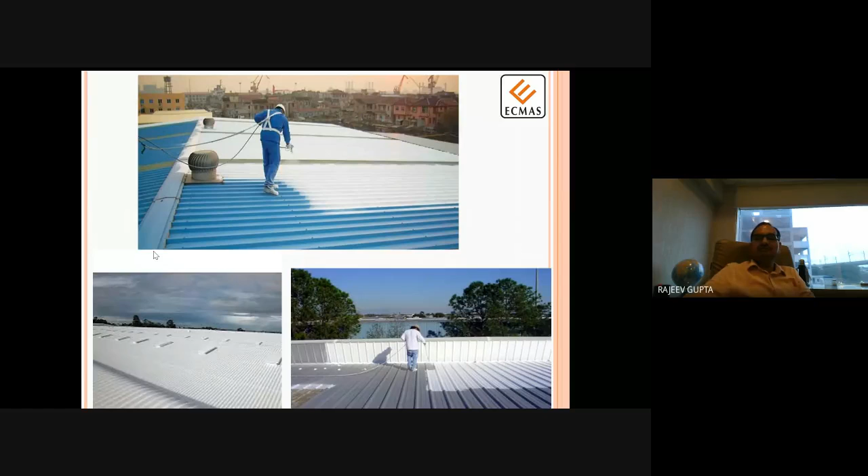So in ECMAS, we offer a solution in the name of ECMAGuard Thermocoat that not only reflects the heat, it also has a very low thermal conductivity because it utilizes both concepts, high solar reflectance and low thermal conductivity, by introducing some ceramic bubbles inside the coating, which are bad conductors of heat. Very easy to apply on existing or new construction. It may be industrial, residential, commercial, any kind of buildings we can apply.

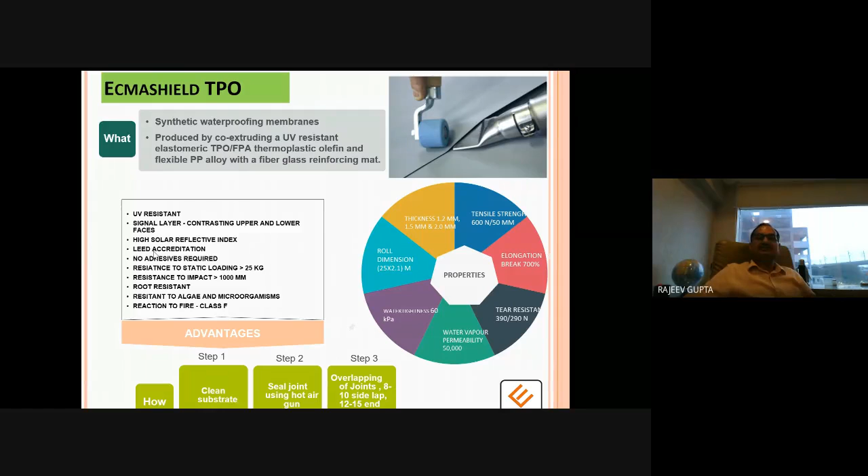Another solution nowadays which helps in improving energy efficiency is TPO membranes. These are factory-made sheet membranes which are used as a waterproofing system along with heat insulation system. They come with a reflective surface. So they provide waterproofing along with heat reflectivity. So overall temperature gain inside the buildings where TPO is applied is less.

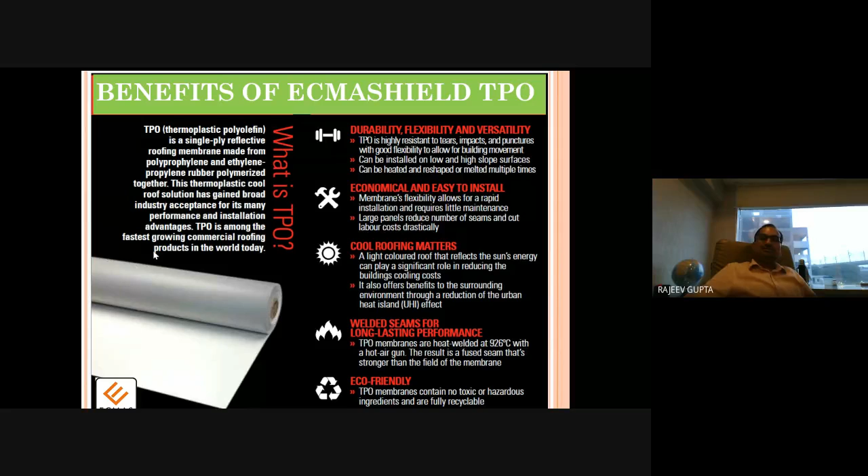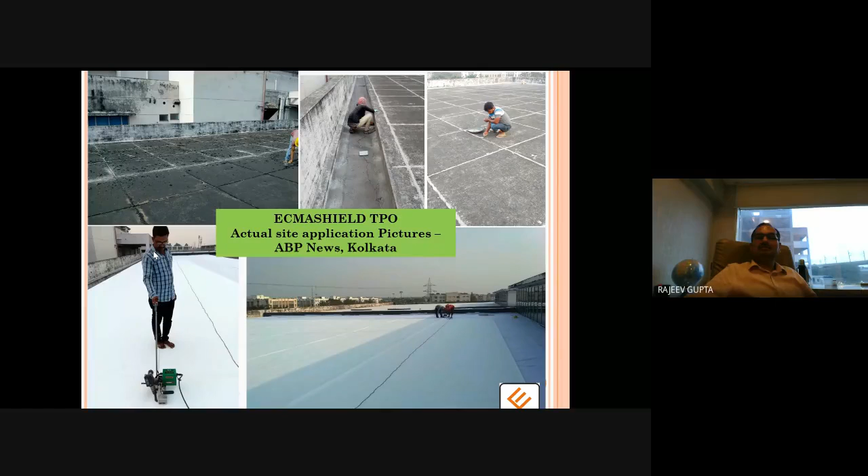These are eco-friendly products, very durable, recyclable, and easy to apply. They are generally loosely applied, so they remain independent of expansion and contractions in the structure. They can be applied only as a TPO system or TPO along with insulation system.

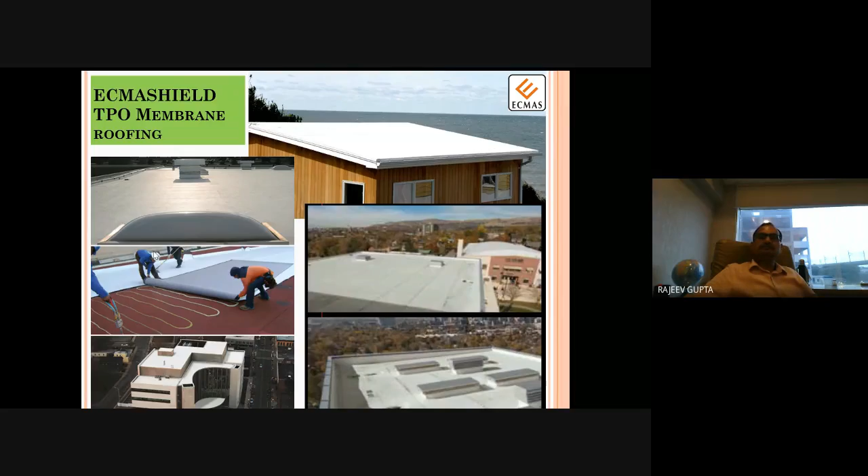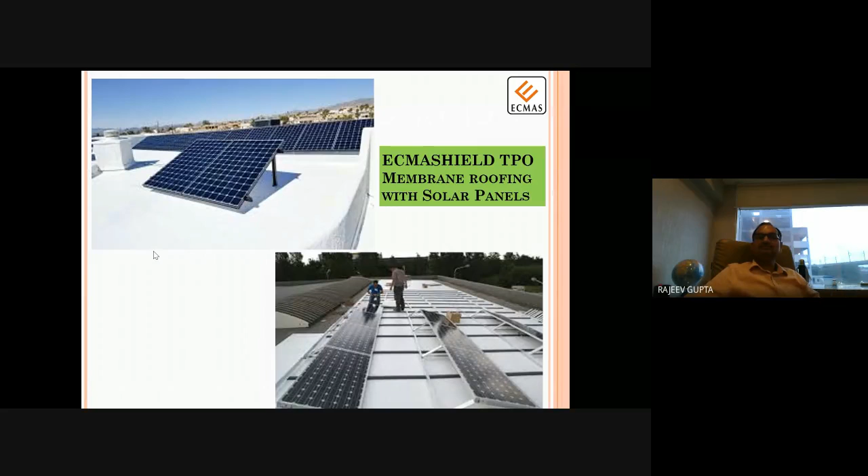So nowadays, a lot of construction or buildings are using TPO membranes and then installing solar panels also. So TPO is helping in reducing energy gain or heat gain, and solar panels are helping in terms of generating solar power. Then usage of spray applied PU foam, I think we have already discussed.

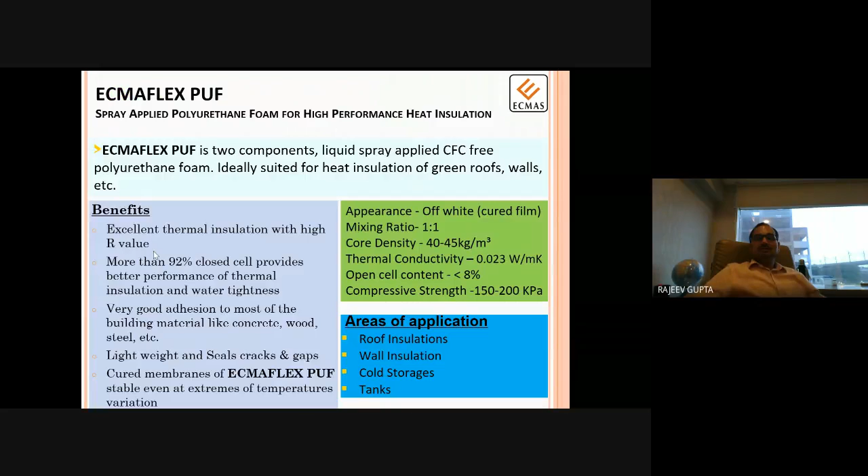So the overall objective of achieving energy efficient buildings is to ensure that we maintain the right amount of thermal comfort without increasing energy consumption too much. A normal building may consume power from 100 kilowatt hour per square meter, and it may go up to 450, especially in case of commercial buildings like BPOs and IT companies, which operate 24/7.

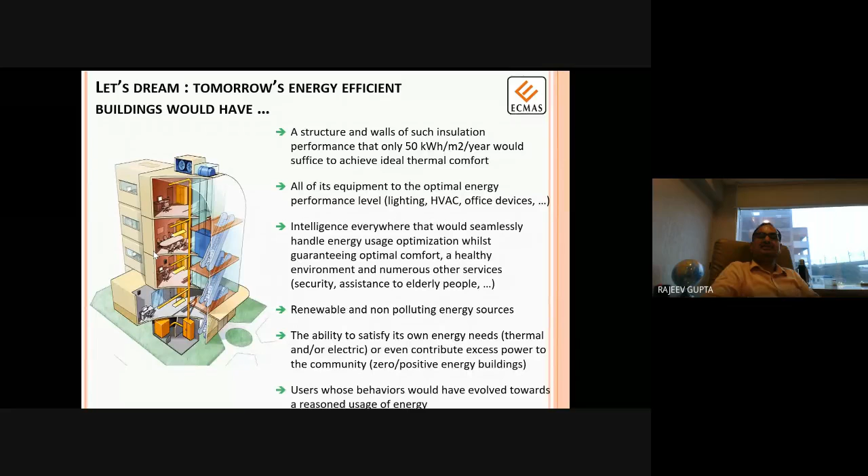So we all can work towards achieving energy efficient buildings. There are a lot of things available in terms of design, in terms of usage of the right kind of construction materials like AAC blocks, AAC panels, uses of different kinds of insulation materials, using green roofs and cool roofs. Thank you.